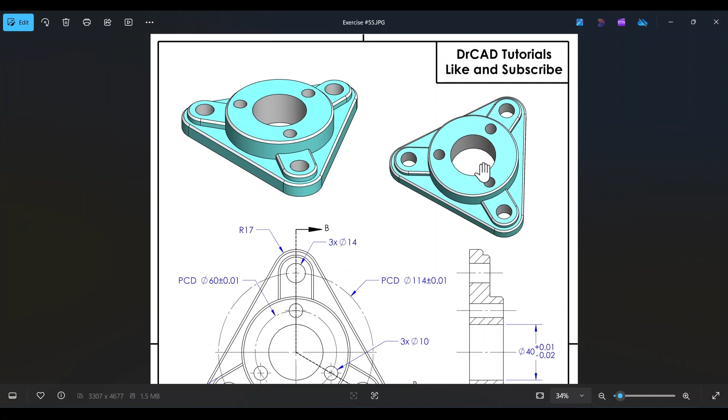Here we see the schematic drawing for exercise number 55. All dimensions are in millimeters. We have the isometric view and the trimetric view, two pictorial views showcasing the component at two different angles. We have the top view, the front view, and the section view, taken along this line here, line BB. So this is section BB.

So in creating this part within SolidWorks, we're going to follow a feature-driven approach. Step number one involves sketching out the 2D profile for the base right here. In this case, it's a triangular profile with rounded out vertices.

So consequently, we have two ways to actually sketch this. Method number one, which is more intuitive and a lot easier, is to use the polygon tool and set the number of sides to 3, creating a triangle, and then rounding out the vertices of the triangle with a fillet radius of 17 millimeters. That will leave behind the basic 2D profile.

Also, the origin of the sketch will be right here. So we're going to set the distance between the center of the fillet arc and the origin as 114 divided by 2, since this is the overall diameter.

Method number 2 of creating this triangular profile would be to sketch out 3 circles, 1, 2, and 3, and assign the necessary dimensions. In this case, all 3 circles lie on a pitch circle with a diameter of 114. Then you use tangent lines connecting the 3 circles, leaving behind the basic triangular profile.

So we have 2 methods. It's up to you, and theoretically you should get the same result for the mass of the component. All right, so that's step 1.

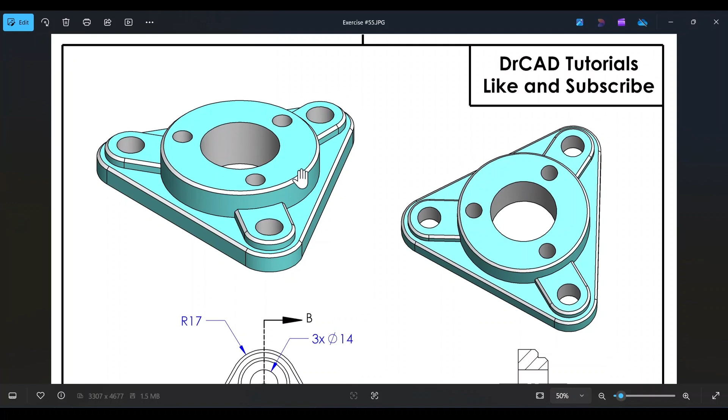Step number 2 would be to create the circular boss here, the cylinder at the top. Very simply, starting from the origin, we're going to draw a circle with a diameter of 80 millimeters, and then use the extrude tool. If we look at the front view, we see an overall height for the cylinder as 25 minus 10, leaving us with a height of 15 millimeters.

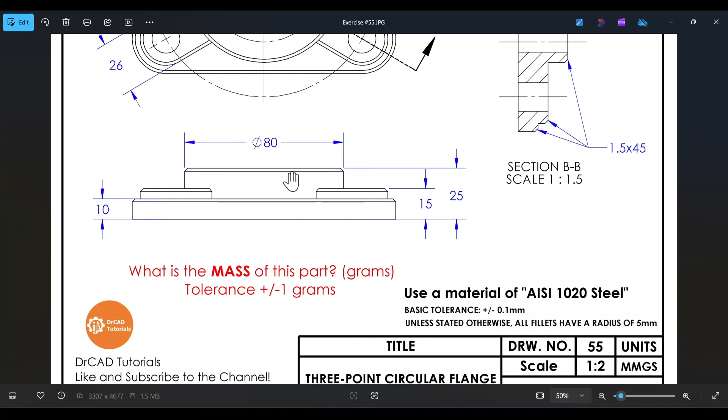Then we have certain 3D features right here for these 3 mounting points. So again, we're just going to sketch out the basic 2D profile and then use the circular pattern tool to create the other 2 copies, leaving behind the basic 3D profile.

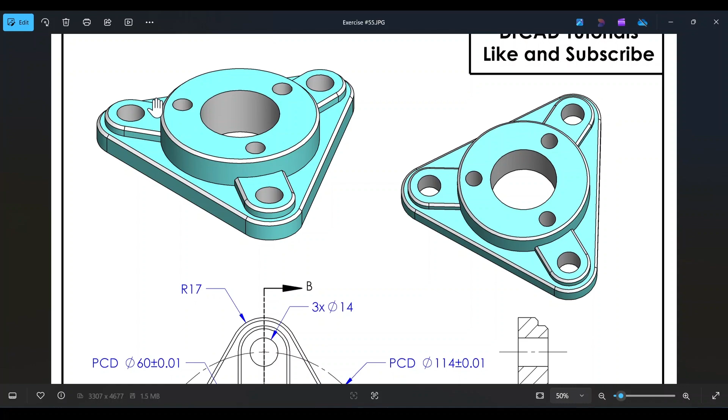And then we have a number of holes. We have 3 holes for the 3 vertices of the triangle. We have 1 larger hole right in the middle, and then 3 equidistant circles on the top face of the cylinder right here. So again, we're just going to be using the extrude cut tool.

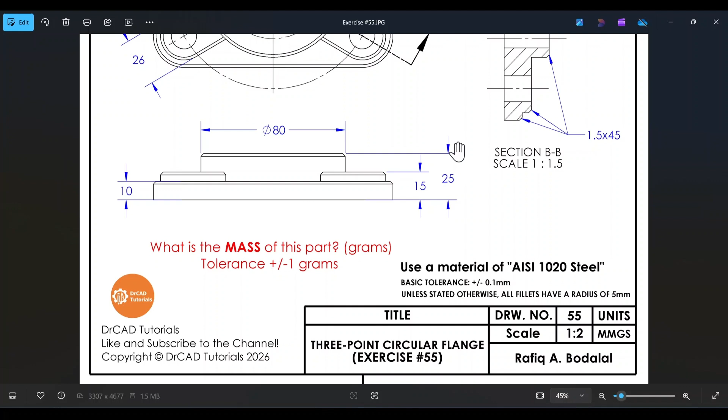The modeling process and everything we did ultimately answers one single question, and that is, what is the mass of this part? Here it says that we need to use a material of AISI 1020 steel. So after the modeling process, we're going to assign a material and then determine the mass of the part. This is a relatively simple problem within SolidWorks, and it should be fun.

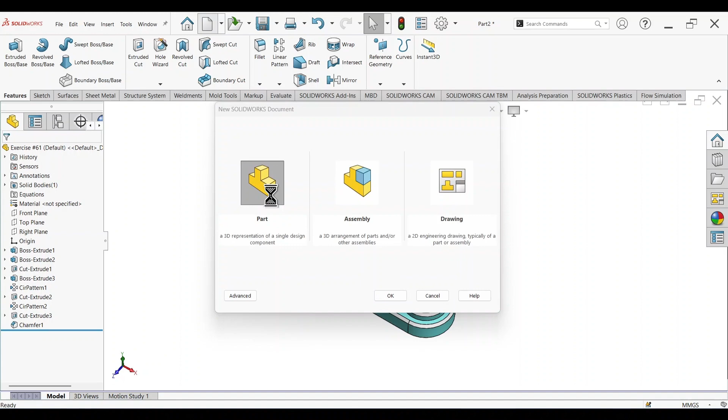Okay, so to start, let's go ahead and create a new SolidWorks part. Let's set the background to plain white, and let's copy exercise number 55 into SolidWorks. Drag this upwards, and let's go ahead and make this smaller.

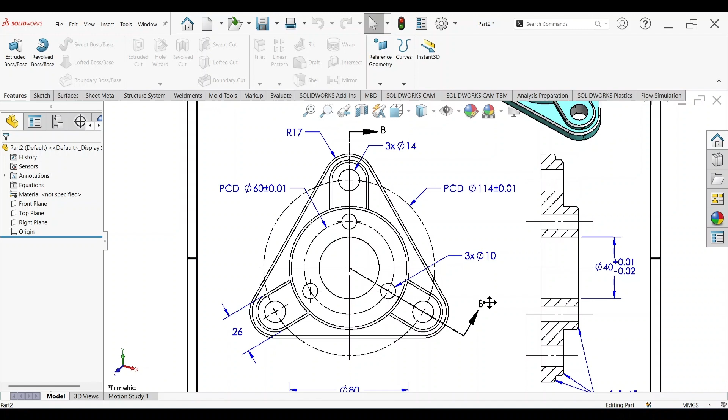So again, step 1 involves creating this triangular base plate. We have 2 techniques. You could either draw a triangle with the center of the triangle being the origin of the point, or you could draw 3 circles, define the distances, and then connect the 3 circles using tangent lines. We have 2 methods, it's your choice. For me, I'm going to use the first method because it's more intuitive and a lot easier.

So to start, select top plane, sketch. Select the polygon tool and set the number of sides to 3. Click on the center of this component and then draw any triangle, any orientation. Click exit, then click on this point and set the relation as horizontal.

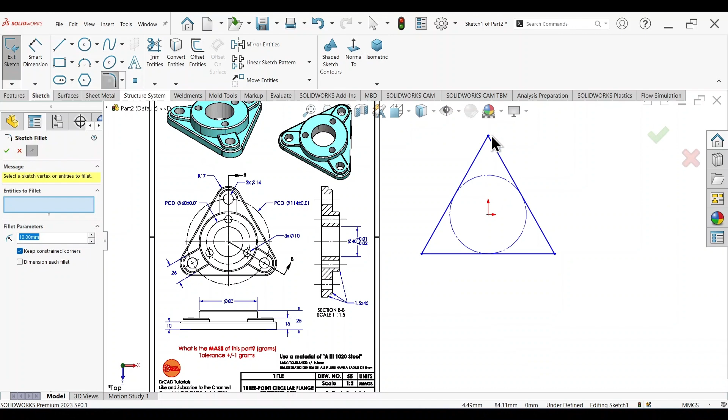Now we need to assign the fillet radius for each of the 3 corners of the triangle. For the closer here, we see that the corners of the triangle are rounded out with a radius of 17 millimeters. Go ahead and assign a fillet radius of 17. Click on these three edges, 1, 2, and 3.

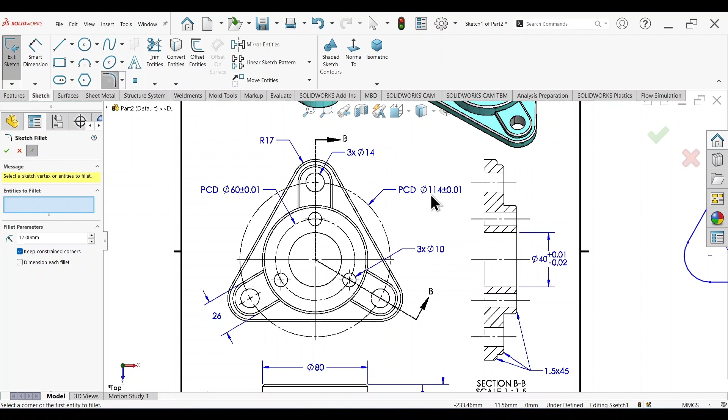Then click OK. As for the distance, the three circles corresponding to the fillet radius lie on a pitch circle with a diameter of 114 millimeters. Of course we have a tolerance here, but we're only going to use the nominal diameter. To define that, activate the Smart Dimension tool, and from this point, the origin, all the way to the center of the circle, say that the distance is 114 divided by 2, since we're defining the radius.

Now, if we draw a circle from this point all the way to the center of the circle, click on the circle and press Q for construction geometry, we can clearly see that the diameter of the circle is by default 114, which corresponds to what we see here on the top view. So this full line profile corresponds to the contour of the base plate.

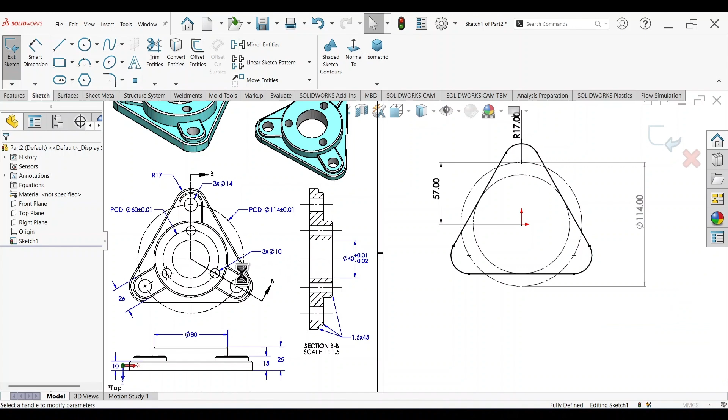Now, simply press the S key, extrude, and if we look at the front view, we see that for the base of the component, we have an overall thickness of 10 millimeters. So by default it's already 10. Click OK.

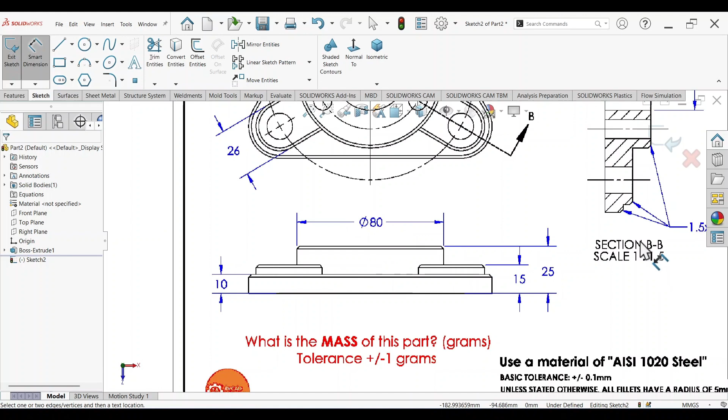All right, now let's move on to step 2, the creation of this boss. Go ahead and click on this top surface, sketch, activate the circle tool, and starting from this origin, draw a circle. Smart Dimension tool, and looking at the front view, we see that the diameter of the circle corresponds from this edge to this edge, which gives us a diameter of 80 millimeters. So this needs to be 80.

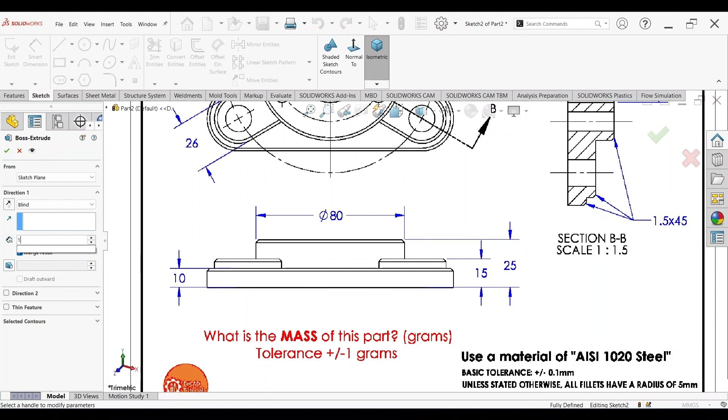Now press the S key, extrude, and looking at the front view, we see that for this middle section, it's 25 millimeters minus 10, which gives us 15 millimeters. Then click OK.

Now we need to create this protrusion here. We actually have 3 of them, 1, 2, and 3. So it's sufficient that we only draw the 2D profile of one of them, perform an extrusion process, and then use the circular pattern tool to create the other 2 copies.

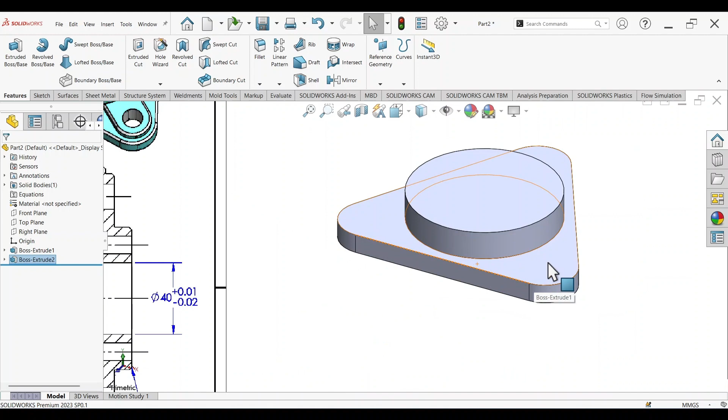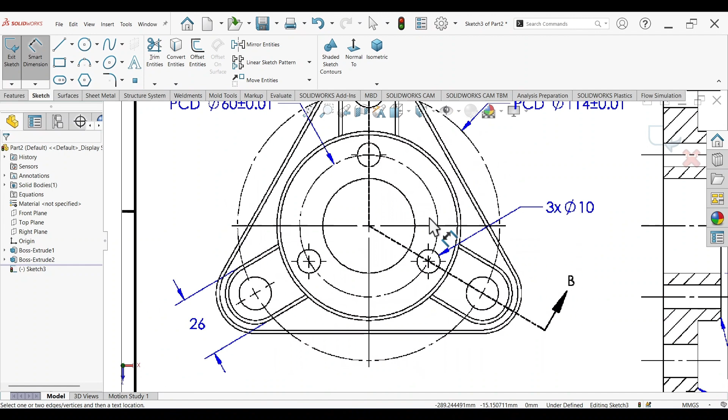To start, click on this surface, sketch, click on this circle, convert entities, zoom in closely, and activate the circle tool. Starting from this point, draw a circle. Smart Dimension, and looking closely, from this edge to this edge, corresponding to the diameter of this circle, it should be 26 millimeters. So this is 26.

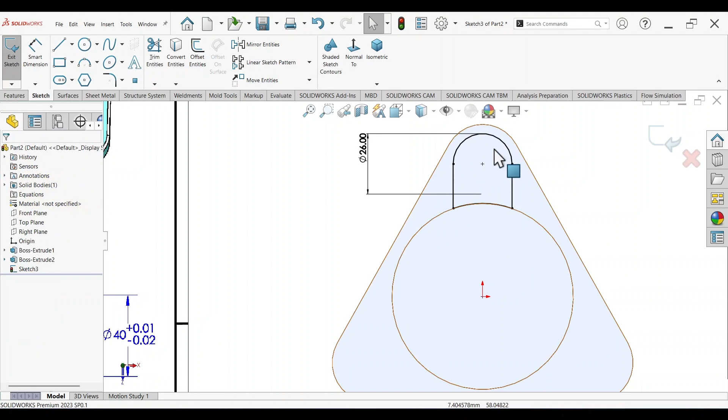Now activate the line tool and close off the figure using 2 vertical lines, 1 and 2. Use the Trim Entities tool and delete any extra entities, leaving behind the base profile for the feature. Now just press the S key, extrude boss base.

Looking at the front view, we see that it is 15 minus 10, which gives us this height right here, 5 millimeters. Then click OK.

Now we need to create the other 2 copies. Press the S key, select the Circular Pattern tool. For the direction, select any circular edge—in this case, the easiest one is the one at the top. The total number of copies is 3, since we have 1, 2, 3. By default, it selected the last feature we created. Now just click OK.

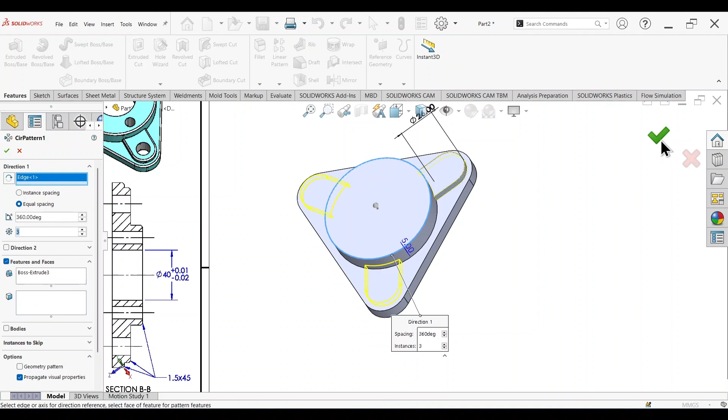Now if you look closely, we have a hole starting from the top face of this cylinder all the way through the component, so it's a through hole. Click on this surface, sketch, and draw a circle.

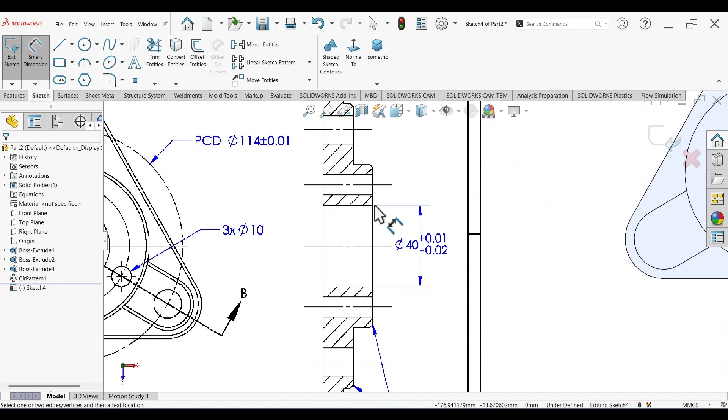Smart Dimension—if we look at the section view, the circle has a nominal diameter of 40 millimeters, so this needs to be 40. Press the S key, extrude cut. We're using the extrude cut tool. Right-click and select through all both directions to set the end condition, then click OK. Repeat the same process for the 3 holes.

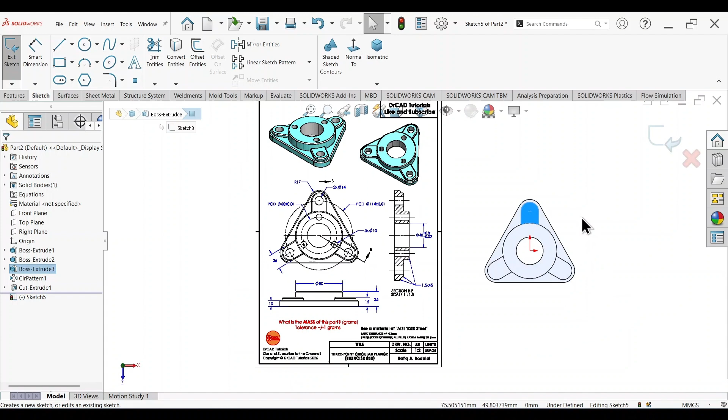Click on this surface, sketch, activate the circle tool, and starting from this point draw a circle—that's one of them. Smart Dimension: on the top view, the hole has a diameter of 14, and there are 3 of them, 1, 2, and 3. So this is 14.

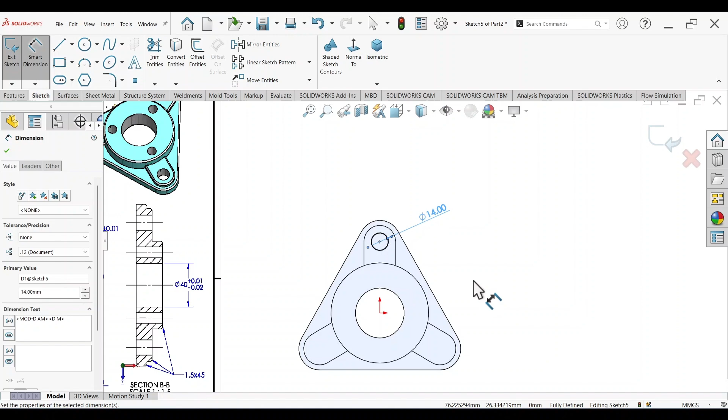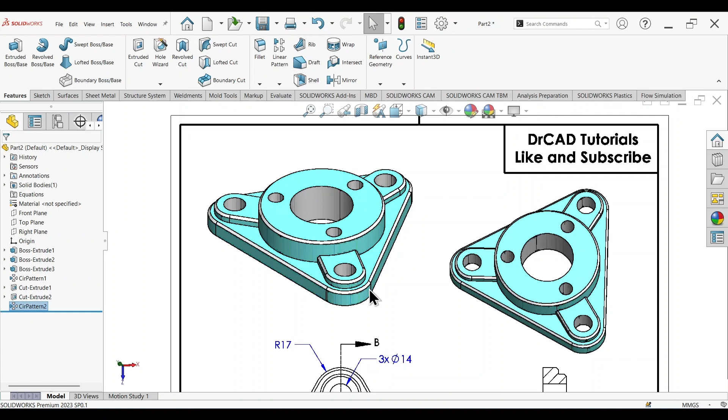Press the S key, extrude cut. Click OK—the end condition is always set to through both directions. Now we need to create the other 2 copies, so press the S key, circular pattern. For the direction, select the circular edge, then click OK. Also notice here we have three equidistant holes that lie on a pitch circle.

The pitch circle has a diameter of 60 millimeters, and each of these holes has a diameter of 10 millimeters. So we'll select this top face, sketch, activate the circle tool, and instead of drawing the pitch circle, we'll just draw one of the circles at any point here. Smart dimension, set the distance between this point and the origin as 60 divided by 2, which is 30. The diameter of this hole should be 10 millimeters. Set the relation between this point and the origin as vertical.

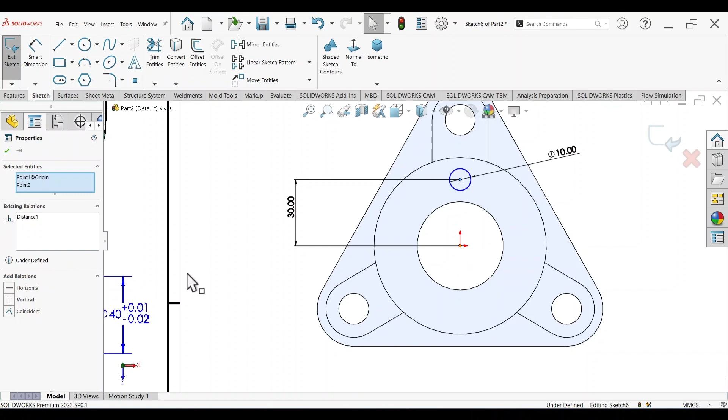Now press the S key, extrude cut. End condition is set as through both directions. Click OK. Press the S key again, circular pattern. For the direction, select this circular edge and set the number of copies to 3, then click OK.

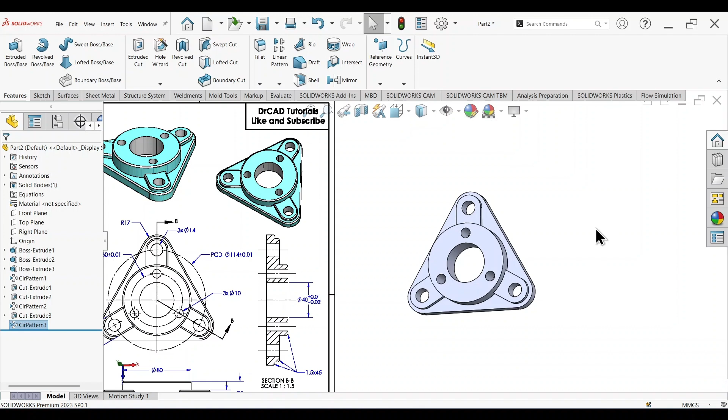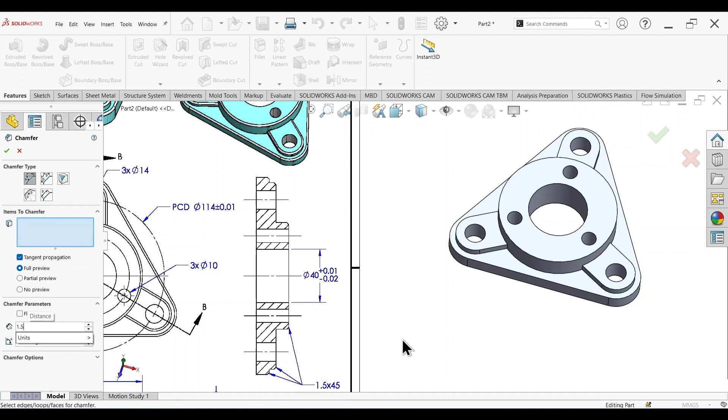We have one last thing to do: we need to find the chamfer. Looking at the isometric view, there are certain edges that are chamfered, and the section view defines the dimension, following the distance and angle convention: 1.5 millimeters by 45 degrees. Select chamfer, set the dimension as 1.5 millimeters by 45, and click on this line here—that's 1, 2, 3, 4, and 5. These are the edges required to be chamfered, then click OK.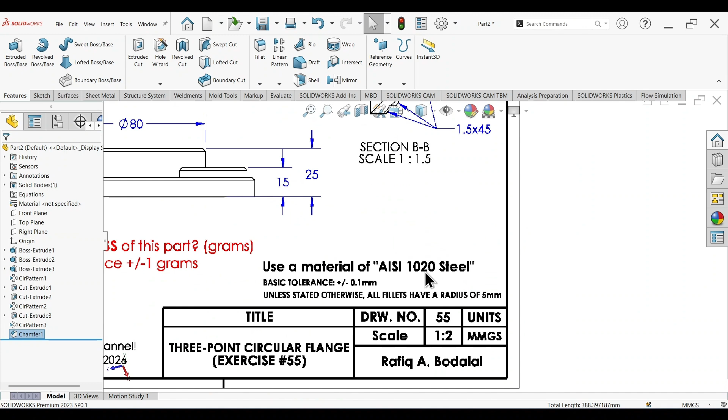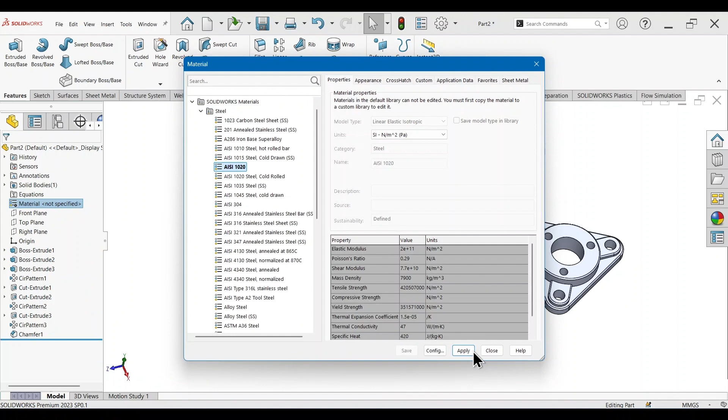That completes the modeling process. Again, we need to remind you that we need to assign a material of AISI 1020 steel. Coloring the component is up to you—you can color it using the light blue color I have here, or select any other color. For the sake of keeping this video short, I'm not going to color it, so go ahead and delete this image. Right-click on material, select Edit Material, select AISI 1020 steel, apply, close.

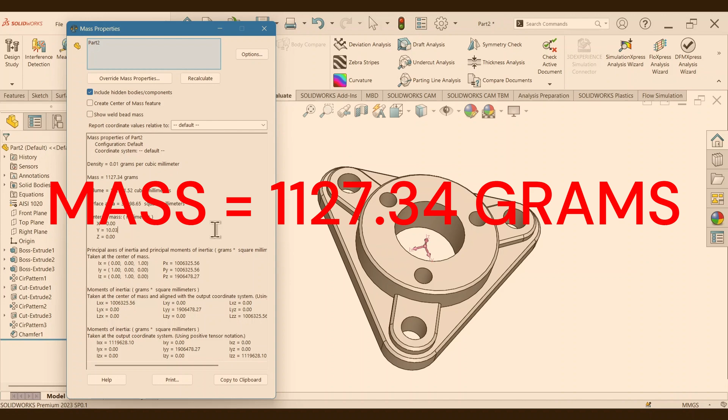Now for the moment of truth, go to the Evaluate tab, select Mass Properties, and if we look closely, we have a final mass of 1,127.34 grams. Our final answer is 1,127.34 grams, so it's 1.12 kilograms. We round things up.